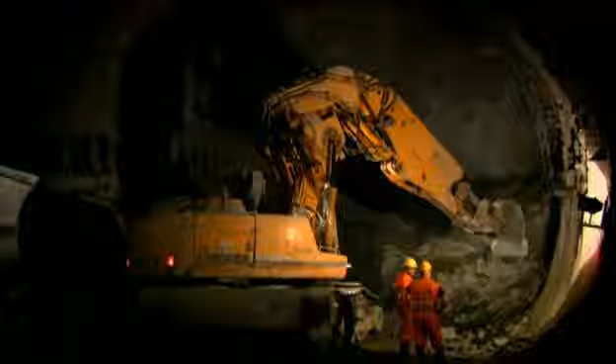But it won't be finished for a while. They've been digging for 10 years, and they've got another 10 to go. They're almost at the halfway point, but not quite, and they're running into trouble.

There are lots of tunnels through the Alps, so what's different about this one? Most mountain tunnels start at altitude. The Gotthard base tunnel runs through the base of the mountains. The pressure from above is far greater, squeezing down on the tunnel, making the job of the engineers much harder, and the work of the miners more dangerous. For 2,000 men working 24 hours a day, it's a tough challenge.

Matthias Neinschwander, chief engineer, is responsible for the largest site and a $1 billion investment. Since the age of 18, he's worked underground all over the world. He's a tunnel rat. He's only 33 years old, but young gun David Fabry is already one of the project's leading troubleshooters. If something goes wrong, he's the man who has to put it right, and fast.

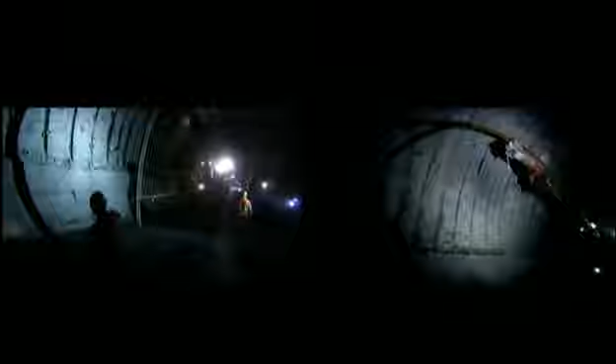Top tunneling engineer Albert Schmidt has to make sure the tunnel won't collapse. He's working a section with the worst geology and fighting a constant battle to hold back the mountain. The lives of thousands of future passengers are in his hands. The Gotthard is the toughest and longest job any of them have ever worked on. I've never been bored one single day in my job here because it's interesting, it's fascinating.

This rail tunnel will join northern and southern Switzerland, cutting a passage directly beneath the Alps. It'll create a new route that will allow high-speed trains to travel from Zurich to Milan in 2.5 hours. The Gotthard Massif is an enormous pile of rock. Today, the only way to cross it is on heavily congested roads or on a punishingly slow train. Freight vehicles crowd Alpine highways, and every year the jams are longer.

Switzerland's clean air and beautiful landscapes draw millions of tourists every year. But pollution is on the rise. The new tunnel promises to ease traffic congestion and reduce pollution. It'll cut the journey time through the Alps to 13 minutes. Freight will go by rail and the roads will flow freely. But the Alps are a geological monster, and drilling through them isn't going to be easy.

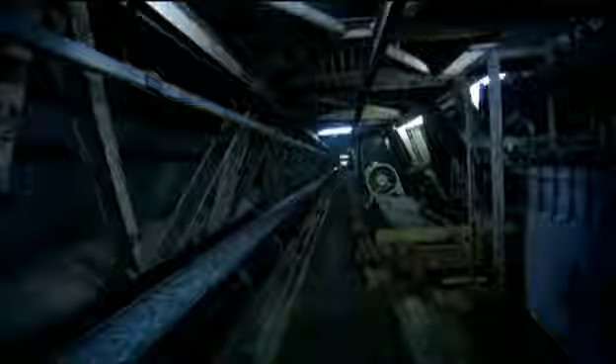The Gotthard is running deeper than any other transport tunnel in the world. In some places, the tunnel has over 8,000 feet of rock above it. There are millions of tons that are pushing, that are weighing on this structure. And when we take out all this material, this huge amount of rock out of the mountain, the mountain itself has to make a reaction. And it did react. 4 miles in, the mountain collapsed onto one of the project's enormous tunnel drilling machines. It's stuck, and there's no reverse gear.

Beneath the Swiss Alps, construction continues on the longest tunnel in the world, all 35 miles of it. With 5 sites and a combined workforce of 2,000 men, this is the largest construction site in Europe. One tunneling machine is stuck and needs rescuing. But they're drilling 2 parallel tunnels, and in the other tunnel, the work goes on. It's dawn, and on a project that never sleeps, a shift is preparing to make the journey to the tunnel face.

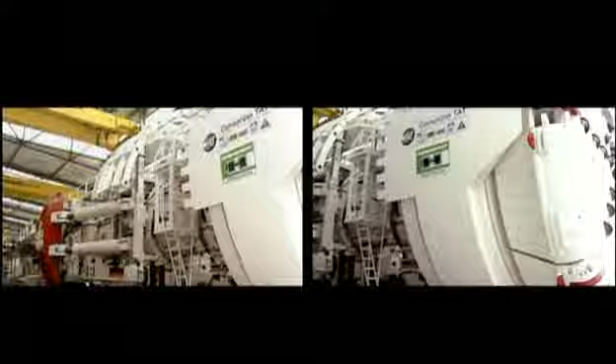The tunnel boring machines specially built for the Gotthard are the biggest land vehicles in the world. Each one cost almost $23 million.

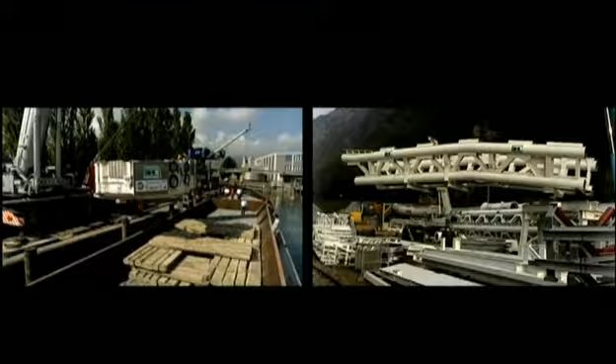Built in Germany, they had to be shipped to Switzerland, and as they're so gigantic, they had to be moved in sections. Once on site, each piece was shifted into the tunnel by train and assembled underground.

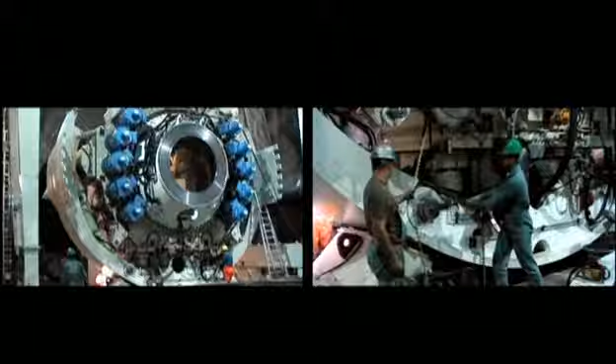Once it's up and running, the hydraulic arms push out sideways against the tunnel walls to give the machine enough leverage to push forward against the rock face. The turning action combined with the pressure crumbles the rock.

And there you have it. A fully operational boring machine the length of 4 football fields. And it won't see the light of day for nearly 10 years.

In each shift, about 25 men work on Gabi 1. But the men who work here at the cutting heads have the hardest job of all.

When the machine is in motion, it rattles violently. They spend 8 hours on a platform that shakes like an earthquake, attaching meshing to the tunnel roof to make it safe from rock falls. It's a dangerous job. If any rocks fall before they shore them up, they're the ones who get hurt.

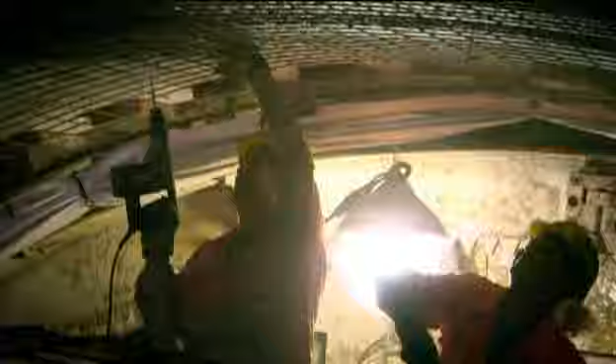Where the rock isn't firm, they also have to drill in long steel rods or anchors, which help stabilize the roof. They use water to cool the drilling heads, which quickly become hot.

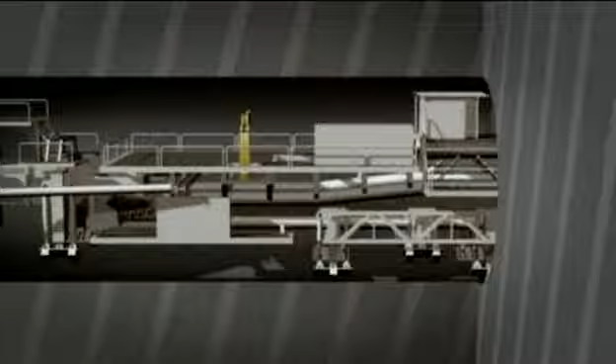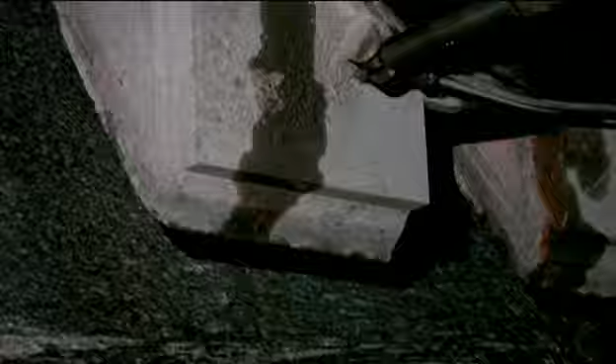Each day, the machine advances by up to 32 yards. It picks up its enormous feet and pulls its 400-yard-long body further down the tunnel. And it takes a whole lot of energy to keep it going.

A long tunnel like this needs a lot of supplies just to get the machine going. We need to take out every single day about 7,000 tons of rock of the 2 tunnels. We need to get into the tunnel about 2,000 tons of concrete poured and sprayed.

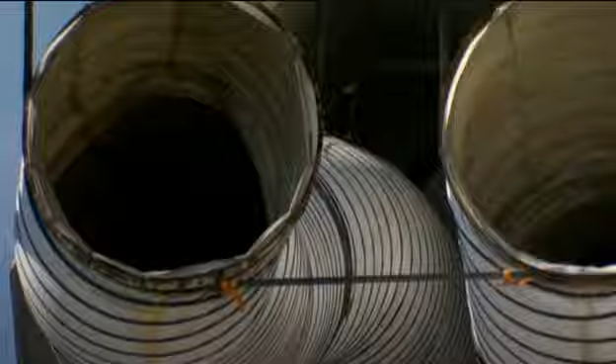We need about 2 million liters of water to get the machines going. And of course, we need ventilation, we need a lot of power. Each and every of those two machines takes about the amount of power it takes to run a small town of 20,000 people.

With workshops for electricians and mechanics, the machine is a constant hive of activity. Because of the vibration, parts are constantly breaking.

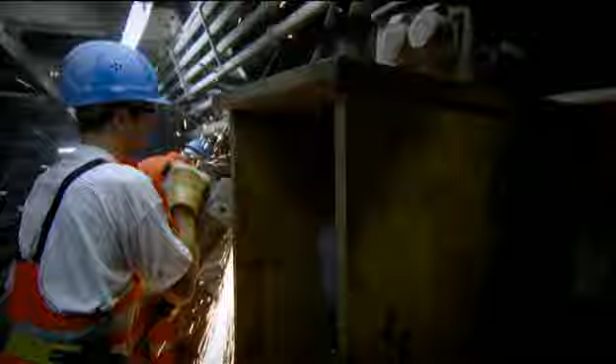The machine is stuck down here for years, so each shift has a crew of electricians and mechanics who fix it as they go.

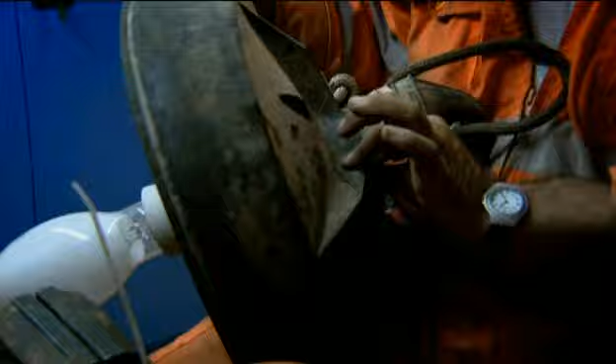Here, look at these two rings. We alter them because the way they are produced directly at the factory can't stand the vibrations. I finally designed this way of doing it with the rubber, so that they don't break as much.

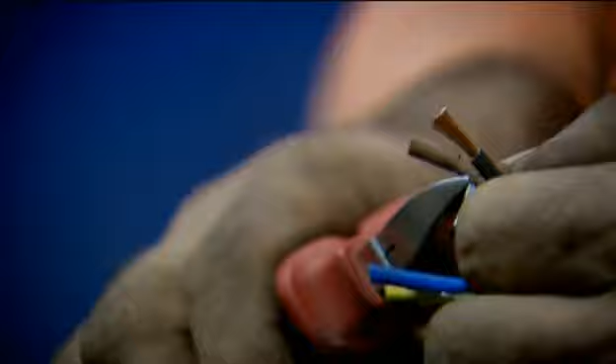But not everything can be fixed this easily. Only 40 yards away from Gabi 1's tunnel, boring machine Gabi 2 has been stuck for the past 2 months.

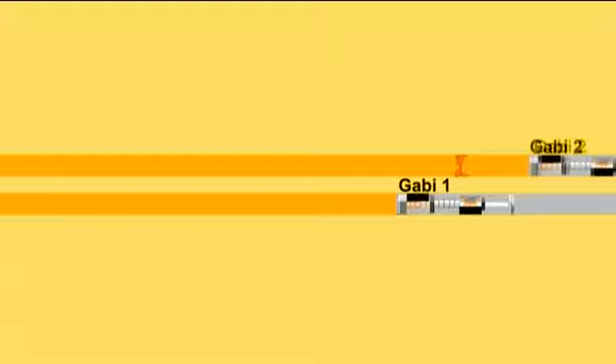The Gotthard project involves digging 2 tunnels, one for northbound trains, the other for southbound ones. Gabi 1 is here, making a steady advance, whilst Gabi 2 is stuck in the parallel tunnel. 2 more boring machines are making the attack from the other side of the mountain. Eventually, they'll meet in the middle.

Engineer Stefan Muff is traveling to check on the progress of Gabi 2's rescue operation. All previous attempts to set the boring machine free have failed. So far, they've been fighting a losing battle.

The tunnel boring machine got stuck because right here the mountains have been worn away by water. It was hard granite, and over millions of years, water was flowing through, which transformed the hard rock into a crumbly sandstone.

And when we entered with the machine, the material came down like an hourglass. And to make matters worse, we had water, and it flooded, and it looked like a huge river had gone through the machine.

Mountain streams and fresh alpine water are beautiful above ground. But below ground, it's a different matter. In the tunnels, water spells danger.

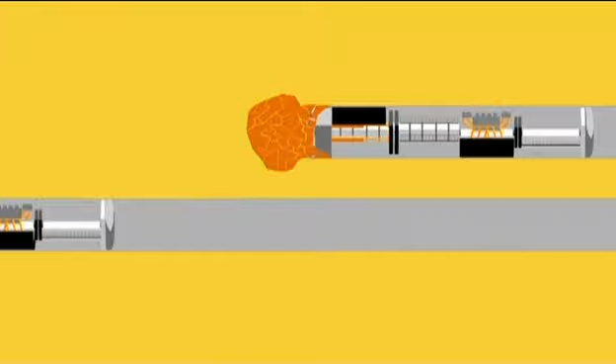When the rock face collapsed, the machine was trapped. To rescue it, Stefan's team are blasting an access tunnel to the drilling head, where they'll clear the broken rock.

The tunnel over there is the one that we will use to attack the bore head directly from the front. This is the access tunnel.

After each blast, Stefan's team clears out the loose material, spraying water to reduce the dust. He's still worried that the rockfall at the head of the machine could collapse on the rescue team.

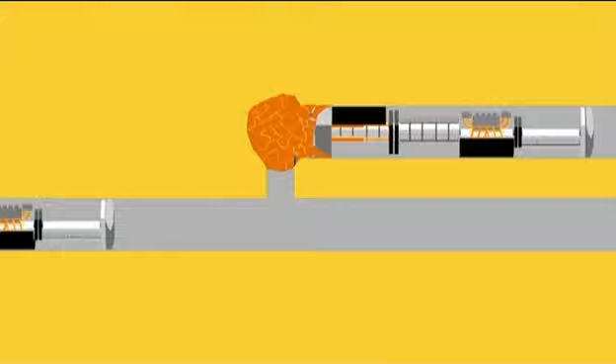They're also blasting another tunnel to the side of the trapped monster. From this tunnel, they'll inject concrete into the crumbling mass of rock so that it's solid and safe when the team breaks through at the front. They're not sure it'll work, but it's their best shot.

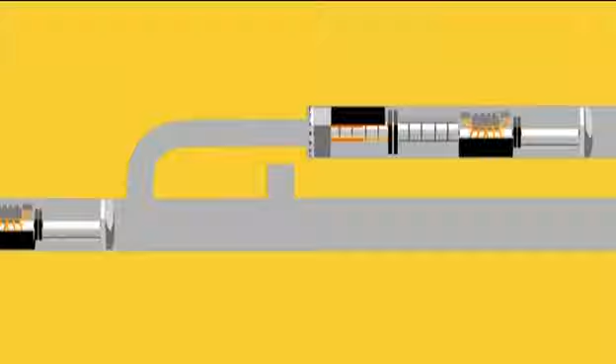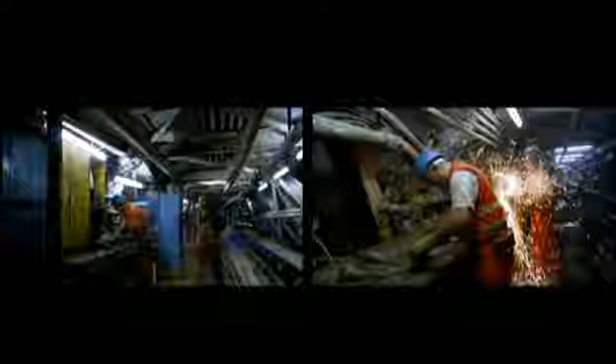With one machine jammed, they need to keep on trucking in the other tunnel if they're to stay on schedule. But a rock face collapse could happen here too. 6 hours out of every 24, there's the maintenance shift, and the machine's out of action.

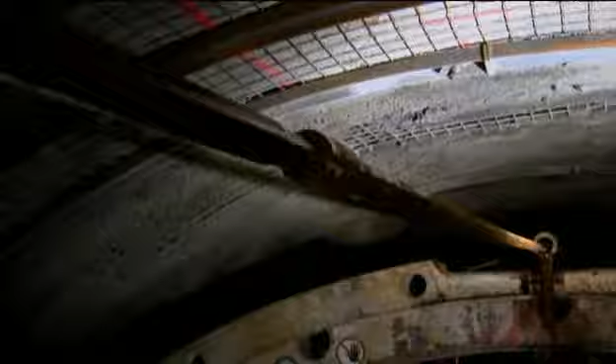That's when geologist Beat Fry springs into action. His job is to collect samples of the rock ahead, discovering if it's unstable or soft, so that he can warn the drilling teams to go cautiously. Since Gabi 2 was caught by its rockfall, everyone's afraid that the same could happen to Gabi 1.

Maintenance investigations are crucial. Without them, they literally can't go on. The aim is to spot the areas where the rock is weaker, where problems might arise, and large sections might collapse. The team uses a very long drill, which allows them to take samples up to 80 feet in front of the cutting head. They add extra lengths as they go.

As the first samples come in, Beat assesses whether it's safe for the boring machine to continue its advance. The fate of the machine rests on his young shoulders.

For the next few meters, the rock will stay the same. We've only done 18 meters, but it will stay the same. No water - that's very important, that there's hardly any water. All clear. But even with these samples, there's no guarantee that the machine will stay safe.

You arrive in the morning and you don't know whether it will be good or bad. Before the machine can inch forward, there are vital tasks to complete.

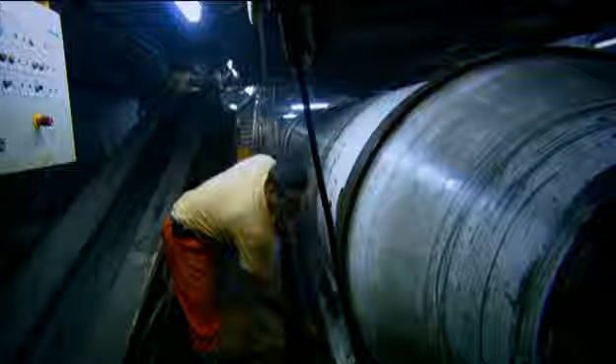So we're digging this 9-meter diameter tunnel approximately in some of the hardest, most abrasive, toughest rocks in the world. And this, of course, causes a lot of wear and tear on the machine and all the equipment. The most important maintenance task is to make sure that tomorrow the machine can cut through the rock just as quickly as today. We have to change cutters, we have to check the cutter head for any kind of cracks. This takes us a lot of time and a lot of energy and a lot of people.

There's 20 to 25 people for every machine that are working on this 6 to 8 hours every day, 7 days a week.

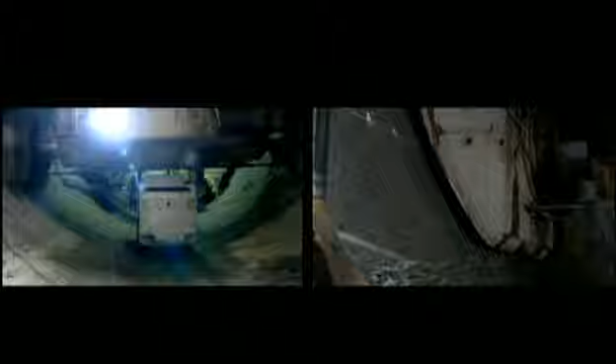The maintenance shift ends, work starts up again, and the metal monster plows forward. They're making good progress. Today they'll excavate over 7,000 tons of rock.

So where does all the waste go? First, it takes the 8-mile journey on conveyor belts and trains to the open air.

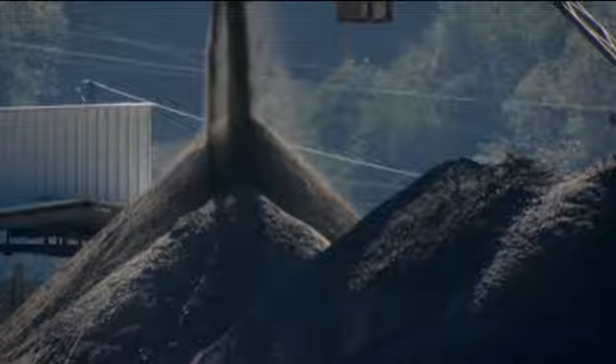Up here, they use some of it for construction projects, but they recycle 25% of it, turning it into a special type of concrete called shotcrete. Shotcrete is a liquid concrete solution that can be sprayed onto the tunnel walls to help strengthen them.

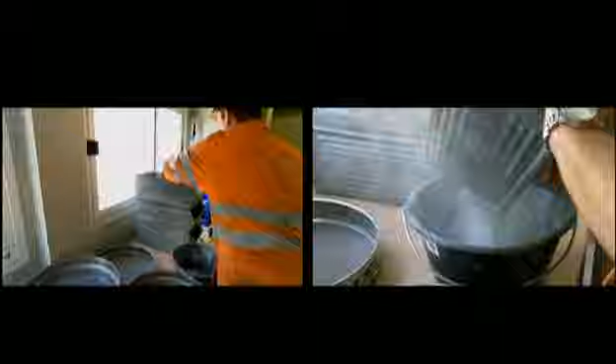It's tricky to prepare. In a lab, the mixture's carefully tested to produce the right consistency. 2,000 tons of this stuff is used in the tunnel every single day. When the batch has been tested, it's loaded onto special trains and sent back down the tunnels to be sprayed on the walls. You don't want to run out of shotcrete, but you don't want too much either.

At his offices in Locarno, David Fabbri has received a worrying phone call. There's a problem with the shotcrete, and it threatens to stop progress in a crucial section of the tunnel.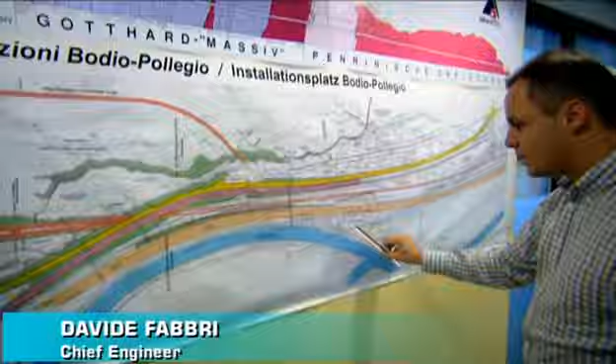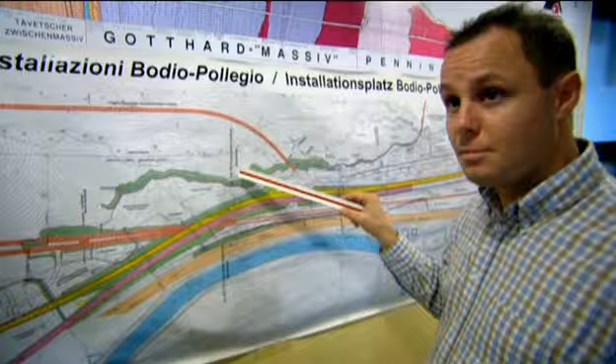But at the southern tunnel entrance, the designers had no alternative. They were forced to lay the route through this landslide. The problem we experienced was that as the river runs here, we couldn't enter the tunnel in this direction. We were forced to enter in this direction, which meant crossing an area made up of loose rock. It was a difficult area to enter, so we had to advance very slowly, and it cost a lot more money.

Tunneling through rock like this is dangerous, so the workers sprayed more shotcrete than usual to secure the roof. Now they found that the roof is secure, but the tunnel's too small. Too much shotcrete is as bad as too little.

Down at the site, there's an emergency meeting. They have two options, and neither looks attractive. Option 1, chip away at the extra concrete. Option 2, reduce the thickness of the final tunnel lining. It all comes down to time, money, frustration.

The Gotthard Tunnel is the longest, deepest transport tunnel in the world. It's 35 miles long and goes where no man has been before. But Davide Fabbri, ace troubleshooter, has just discovered that at the edge of the possible, solutions to problems can become problems of their own.

In the Gotthard Tunnel, work continues on the longest tunnel in the world. They're nearing the halfway mark, a key milestone and a crucial deadline. But one tunnel boring machine is trapped by fallen rock, and the geology up ahead looks fragile. No one's betting that they'll make it to the halfway point on time. The deadline is slipping away from them.

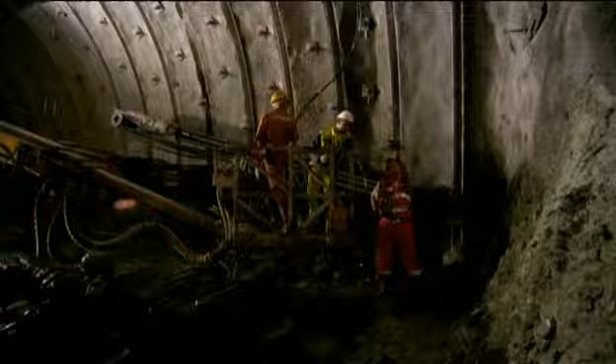Down here in the belly of the earth, with the exit over 3 miles away, it seems like a death wish to let off an explosion. Meet explosives expert Silvio Sangato. He sets off underground explosions every day.

He starts by visiting the site to check how much liquid explosive he'll need. Well, first we look at the rock's consistency. The harder the rock, the more explosives we put inside. And that's it.

Before setting off an explosion, Silvio dashes off to the explosive storeroom to collect the detonators. Everything is stored in a secure room and he's the only one allowed in. Down here, the rules are strict because mistakes cost lives. If you want to set off an explosion, you have to prepare the tunnel face.

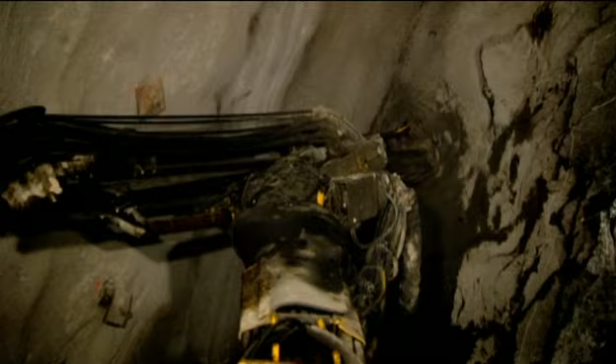Enter the Jumbo, a huge mechanical octopus with 4 drilling arms. This beast can drill 4 holes at once, saving lots of time. These holes will later be pumped full of explosives, so they have to be in exactly the right place. Using a high-tech laser-guided system, the operator can line up the drilling arms with pinpoint accuracy.

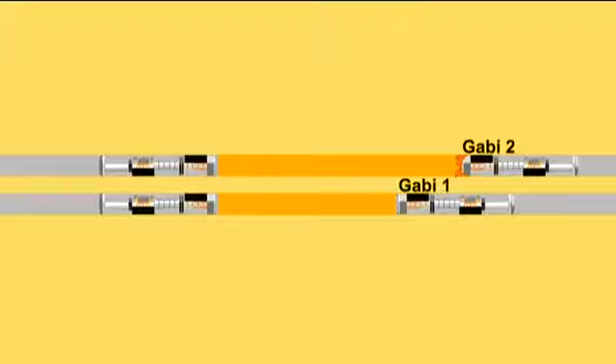A new explosion may solve one problem, how to tunnel through soft rock, but it'll cause another, how to support the newly blasted space. Between the 4 boring machines, there's the soft rock fault line, where explosives have to be used.

The man in charge of this section of the tunnel is Albert Schmidt, the master of the blasters. Soft rock is the curse of his life. As the mountain presses down, the support structures crumble and crack. For the past few years, Albert has been fighting a constant battle to keep the mountain from crushing the tunnel.

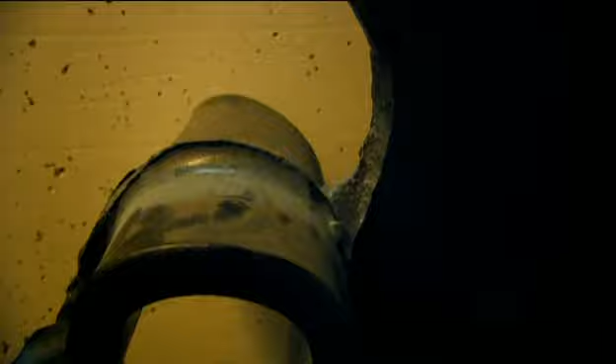Their first idea was to use the strongest steel they could find. It wasn't strong enough. This was a very rigid system that we had placed in the tunnel, and you see how the forces of the mountain destroyed this beam. It's really heavy. It's certainly more than 100 kilos.

So if the mountain can crush one of the heaviest beams around, what's the answer? Albert found it far away in a factory in Germany. Since the 1850s, Bochumer Eisenhütte has been designing steel reinforcements for tunnelers, and they have the solution to Albert's problem.

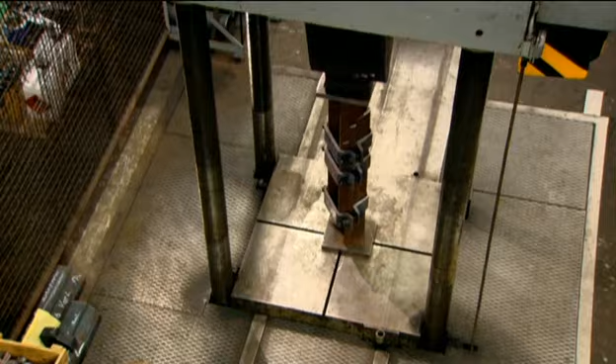It's as simple as this. Instead of going strong and rigid, think flexible. Don't fight the mountain, go with it. It's a beam with moving parts held together by clamps. This beam will move with the mountain instead of breaking under its pressure.

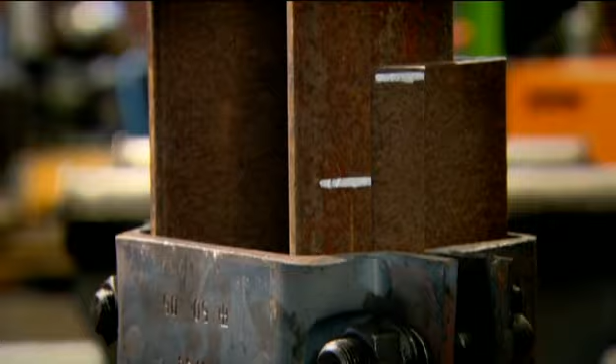Here they test how these beams will react under the mountain's force. They put a small section of the beam under varying pressures. A rigid beam would snap, but this system collapses into itself, shrinking without buckling.

Where the rock was softest, the engineers decided all the tunnel supports should be replaced with a new system. Albert's on his way to see one of the new arches being put in place. Putting up the new arches is like corralling a wild horse. It's dragged reluctantly to its new home.

Before they're concreted in place, they're allowed to sit for up to 2 months as the mountain presses down, forcing the arches into their final position.

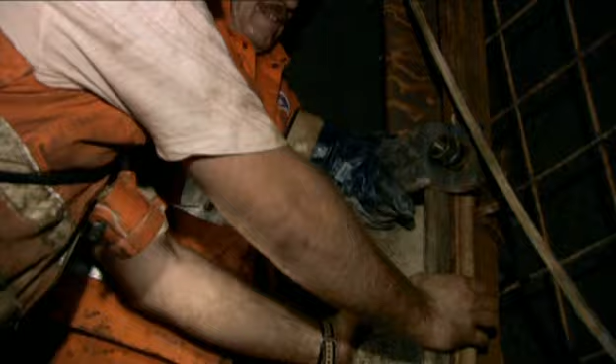These new tunnel supports are vitally necessary, but they've pushed the whole operation behind schedule. That halfway deadline next month is looking a long way off. The more anchors and the more shotcrete we have to put in this supporting system costs, first of all, a lot of money, more money, and it costs also a lot of time. Time is something that they just don't have.

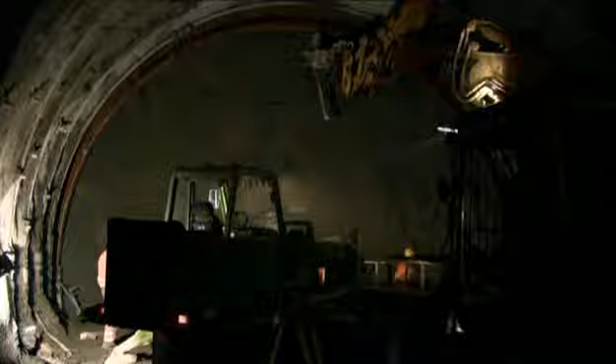Albert is making sure the tunnel stays up. But sometimes the solutions to one problem can cause another problem down the line. Shotcrete, a liquid concrete solution, is sprayed to shore up the tunnel. But in the southern section, the shotcrete team overdid it, and now the tunnel's too narrow.

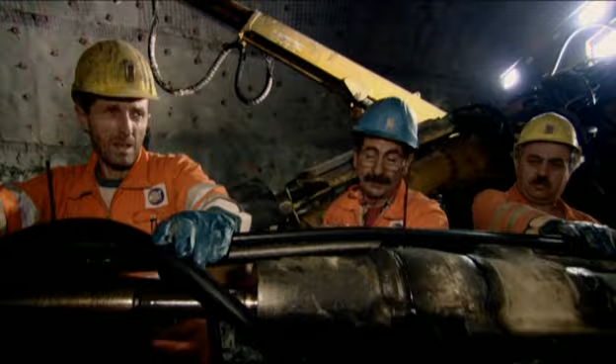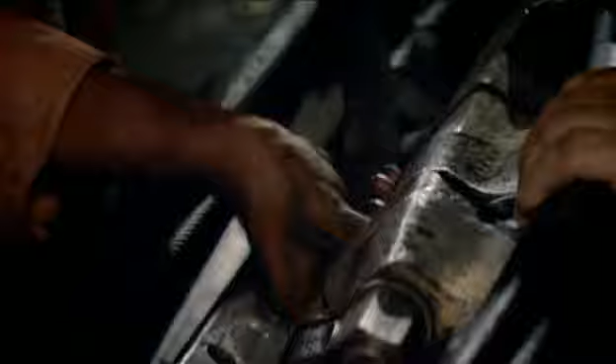Blasting continues, but there's a problem with one of the jumbos. It has a broken arm. More delay. The mechanic's been called, and everyone's roped in to give him a hand. One of the oil pipes is broken, and they need to cut out that section and replace it. They can't finish prepping the explosion until the machine's back up and running.

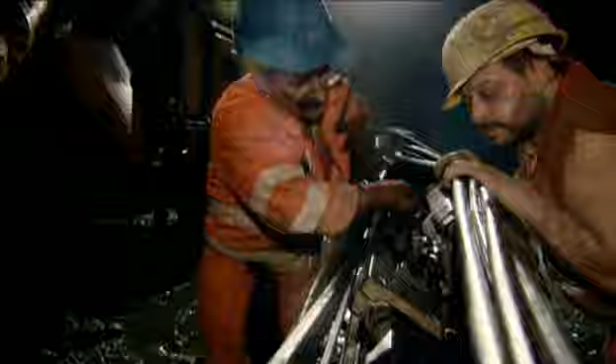But time is slipping away, so the team starts laying the detonators. After some blood, sweat, and tears, the jumbo is going again. The final holes can be drilled, and the remaining detonators can at last be laid.

We have made the connection with the electrical detonator on the circuit line. Everyone clears the site and moves back to a safe distance. Now he's calling to sound the firing warning in all the tunnels. When he's sounded, he gives me the signal and I fire.

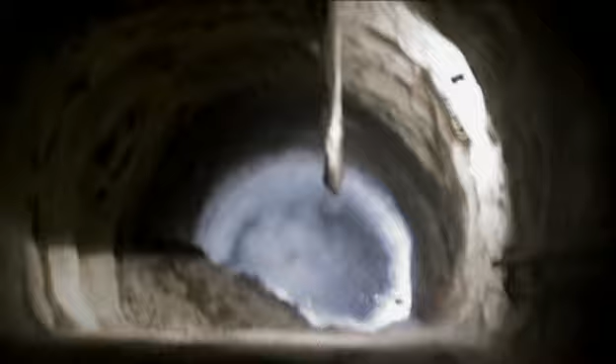Silvio is a man who really loves his work.

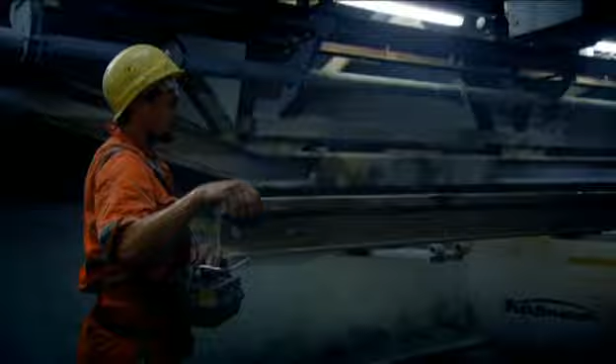Back at drilling machine Gabi 1, work continues. Over the past 2 weeks, they've advanced by a huge 1,000 feet. As the machine moves forward into the mountain, the exit gets further away and the journey to work gets a little longer. Air and water supply pipes need to be extended, and the men lay new tracks with metal sleepers for their commute to work.

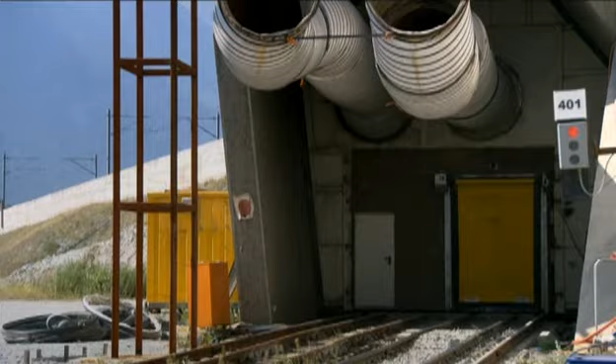Today they're having problems with the cooling system. Temperatures are on the rise. Keeping the tunnel well ventilated and cool is one of the engineers' biggest problems. With a long tunnel like this, we need a ventilation system that allows us to bring air into the tunnel up to 15 kilometers. So we got an airflow, an inbound airflow in the eastern tube and an outbound airflow in the western tube.

Rock temperatures at this depth are 113 degrees. The enormous pressure heats up the rock. Combine this with the heat produced by a huge tunnel boring machine, and you need the mother of all air conditioning units to keep you cool. And when it's not working properly, it makes work down here harder than ever.

On a good day, it's 80 degrees in the tunnel, with around 70% humidity. Today, the temperature's been hitting 115, and the humidity's almost 100%. Despite today's tough conditions, the men have excavated an amazing 9,000 tons of waste material. The day shift is finished and the night shift are about to go in. Another day is over. The tunnel's a little longer, and it's time to kick back.

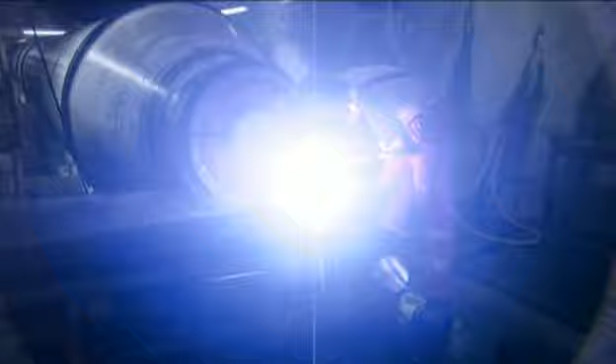Davide Fabbri has found a solution to his concrete problem, but the troubleshooting never ends. Albert Schmidt is still fighting to hold the mountain up, but at last he's beginning to win his battle. Matthias Nordschwander has managed to keep his boring machine out of trouble, but there's always one more problem to solve. I want to take a look at what this oil loss is there. Oil leaks are common, but still taken very seriously.

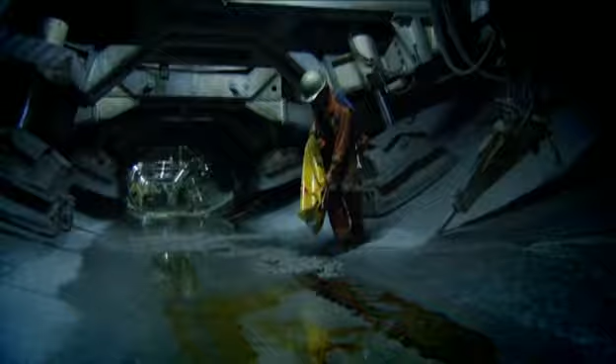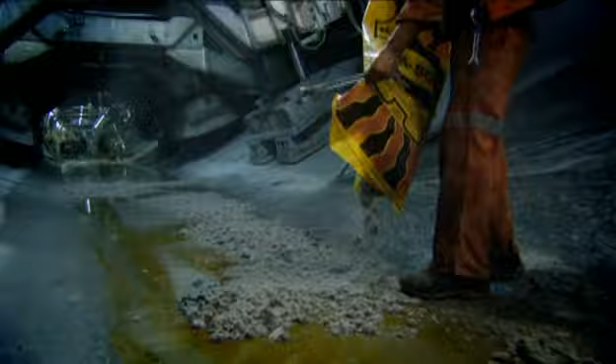We need a lot of hydraulic oil for all our equipment. Every once in a while it happens that some oil gets down to the bottom of the tunnel. The crew will absorb it with a special cellulose absorber. There's virtually no chance of a drop of oil getting out to the river. We do a lot for the environment. This is maybe the most important environmental project Switzerland has known since the industrial era.

In Switzerland, the environment is a top priority. Its clean air and beautiful open spaces draw millions of tourists every year. The tunnel promises to cut traffic congestion and reduce pollution so that Switzerland remains as beautiful as ever. It's the last week in September and the site is a hive of activity. Preparations are being made for the open day, when the public are invited to come in and see the tunnel. But today is extra special.

Progress is fantastic. We just done 50% of the whole system with 77 kilometers. That's one more reason to have a party. We have over 10 million cubic meters of rock to excavate, and about half of that has been taken out so far. So that's a big chunk of mountain that we've taken out.

So what do the public think? We appreciate it. We appreciate very much the courage man has to confront such enterprises. It's mind-blowing, really. Beautiful. I think the idea is very good. The traffic jams will be reduced a great deal, especially when the heavy trucks will be off the roads and on the trains. That's very good. The band strikes up and families take their first ever trip into the tunnels.